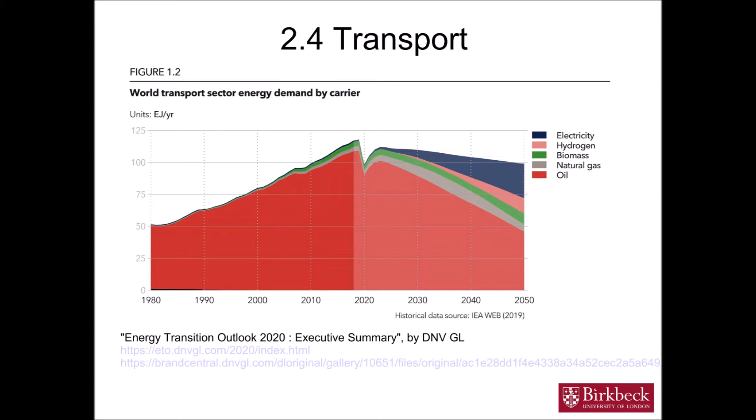The reason why fossil fuels are still very significant for transport is because of the energy density in these fuels. More energy is packed into a smaller space, and this is important when you are carrying goods and people.

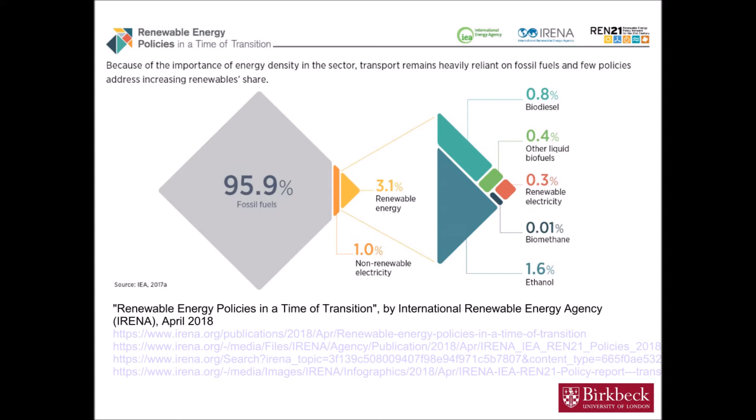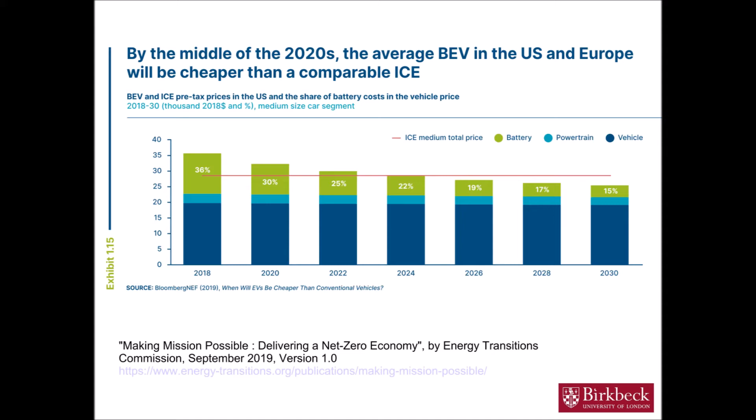With cars, which are smaller and often make shorter journeys, battery electric vehicles will become more popular and more widely sold, and as time goes by will become relatively cheaper than a comparable internal combustion engine vehicle. ICE vehicles usually burn diesel or petroleum gasoline. The decarbonisation solution for cars is clearly battery electric.

But what about freight? That is, the vehicles carrying goods long distances. Currently, trucks and buses are responsible for a very high proportion of greenhouse gas emissions in the transport sector. It's clear that some focus should be placed on dealing with this part of transport.

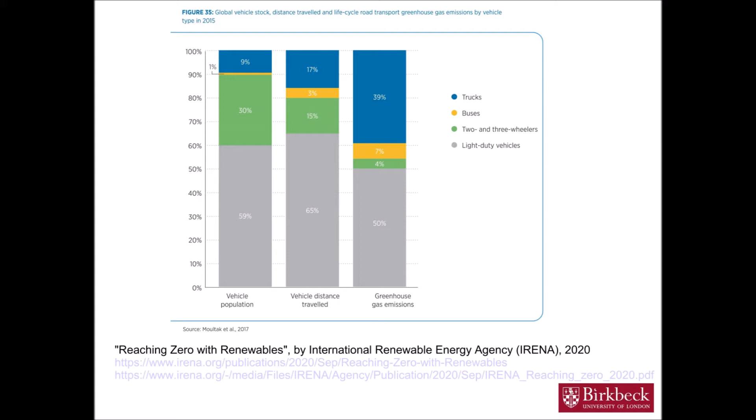Despite the fact that battery technology is improving, it will still take some time before long-haul, long-distance battery electric vehicle trucks become cost competitive. For these to be successful, there needs to be a wide network of fast charging or supercharging for these larger vehicles.

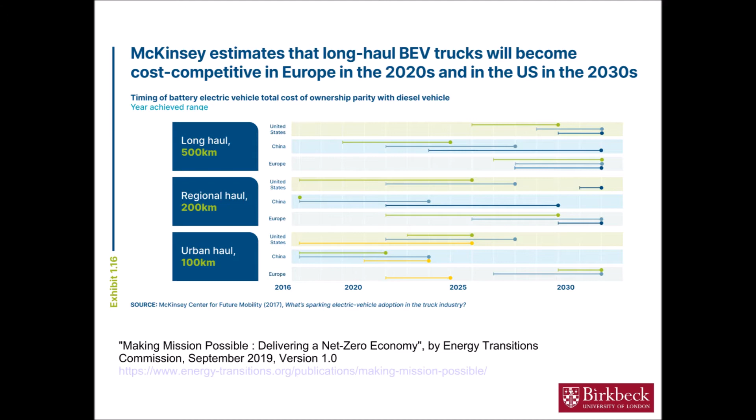Converting transport to electric drive will be very successful, but there will be a large percentage that is unreachable by battery electric technology. This missing 40% needs some work. There are a number of proposals for alternatives to battery electric vehicles, particularly for heavy-duty trucks and lorries.

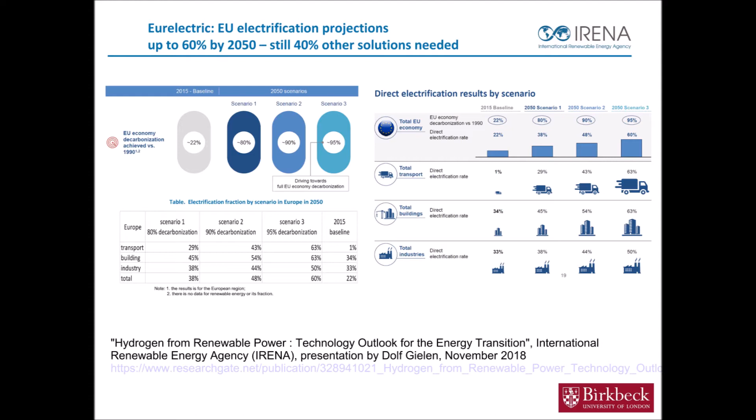One of the key fuels recommended for long distance and freight transport is hydrogen gas. So now we're going to take a little look at hydrogen. Most recent projections and proposals include hydrogen and other renewable gases. This Sankey diagram from the Energy Transitions Commission gives electricity the main seat at the table, but shows that hydrogen is an important secondary source of energy.

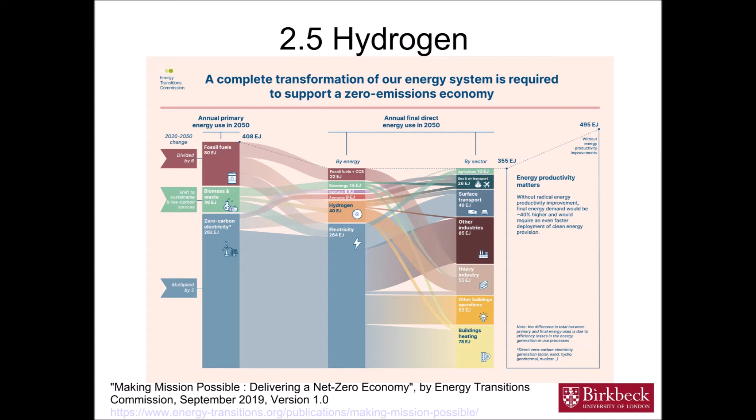Hydrogen is by no means a new energy fuel. For decades, town gas was delivered to people's homes. It was made from coal. The large structures that stored the gas, gasometers, can still be seen in various cities.

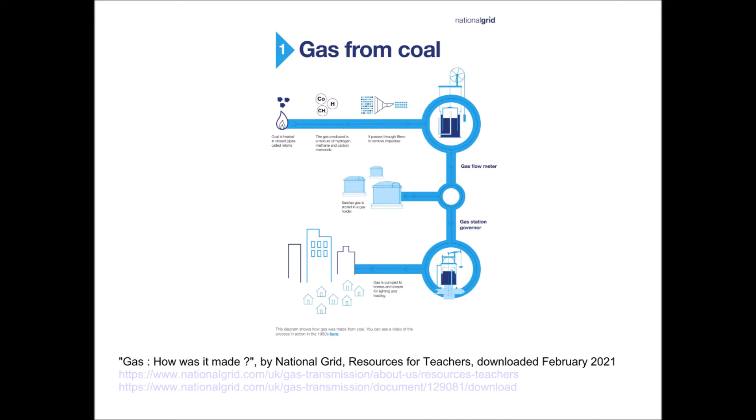Hydrogen is also in use in other parts of the economy. For example, in the refining of petroleum and also in the manufacture of ammonia for fertilizer. It is also important in one of the key technologies for manufacturing iron, and it is a key feedstock for the chemical industry, quite frequently through the synthesis of methanol.

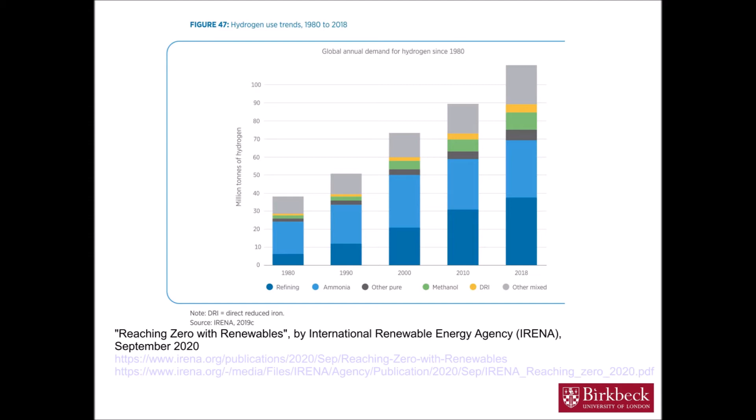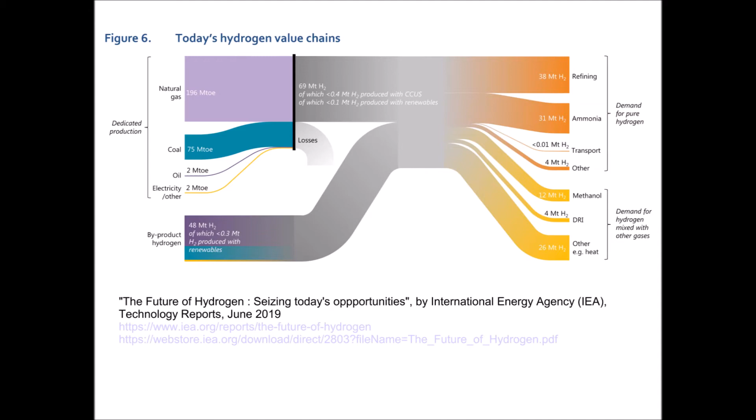Hydrogen today is mostly sourced from fossil fuels, but also partly from byproduct hydrogen, waste from other technology and chemical processes. The demand for hydrogen will continue to increase, and this will be across the economy, industry, buildings, and in transport.

And it is important to notice that hydrogen will be used to make further fuels. This will be very important for the aviation sector, as it is not anticipated to be able to fly large planes using electricity. The energy density of hydrogen will not be sufficient for large planes, and so hydrogen will be used to make higher energy density synthetic fuels.

Notice too that this ETC modelling includes energy storage. One of the key aspects of making gas is that you can use electricity to make gas and then store the gas until it's needed because there's no wind and it's dark. Gas can be stored for months at a time and so can provide buffering of energy supply and demand across the seasons.

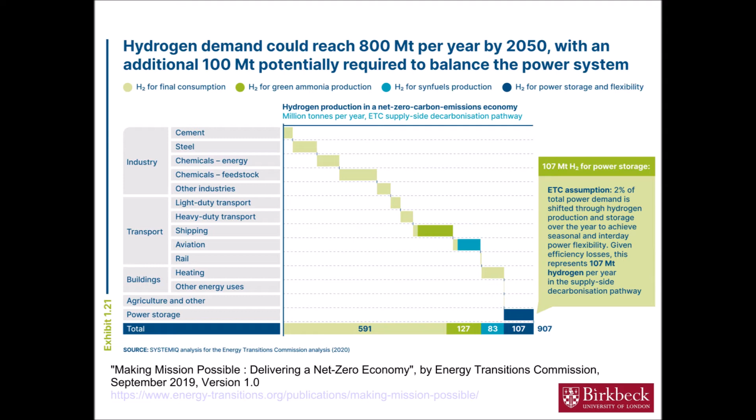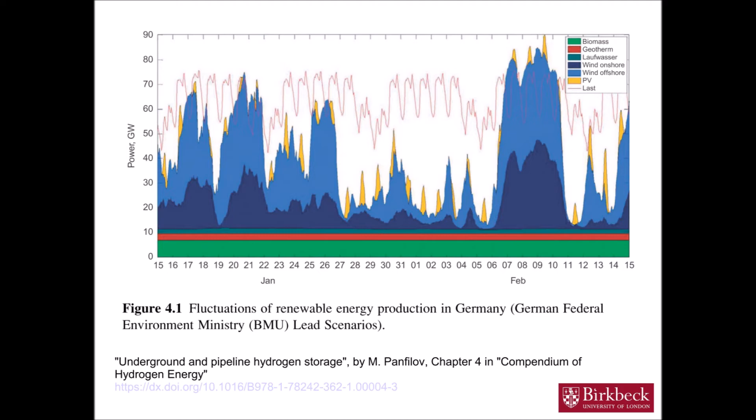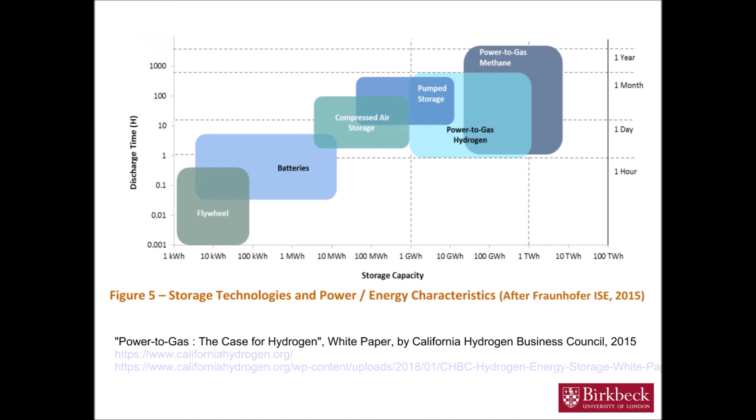Everybody is talking about hydrogen, but what kind of hydrogen? Truly green hydrogen will be made mostly by electrolysis, that is, the splitting of water by the use of renewable electricity.

Most industry communication at the moment is about blue hydrogen. This is either the steam methane reforming, or SMR, of natural gas, or the gasification of coal, but both of these technologies would need to be accompanied by carbon capture and storage in order to be acceptable in a low emissions economy. Grey hydrogen would be SMR or gasification of methane or coal, but without the carbon capture element.

Turquoise hydrogen is a definition that includes pyrolysis of methane, where the hydrogen would be released from the methane without the carbon being turned into carbon dioxide. The carbon would become black ash, a solid that could be buried.

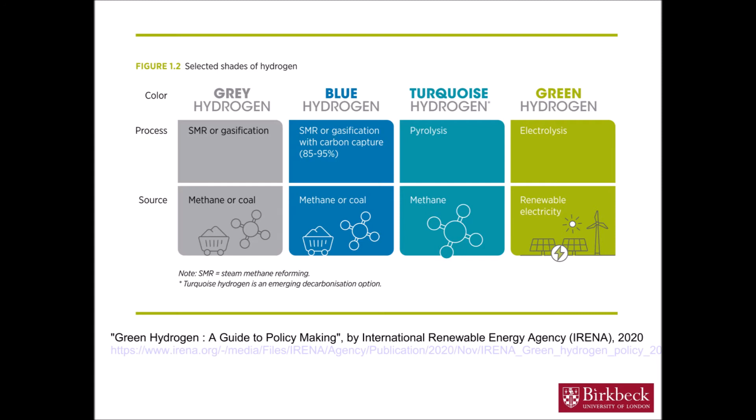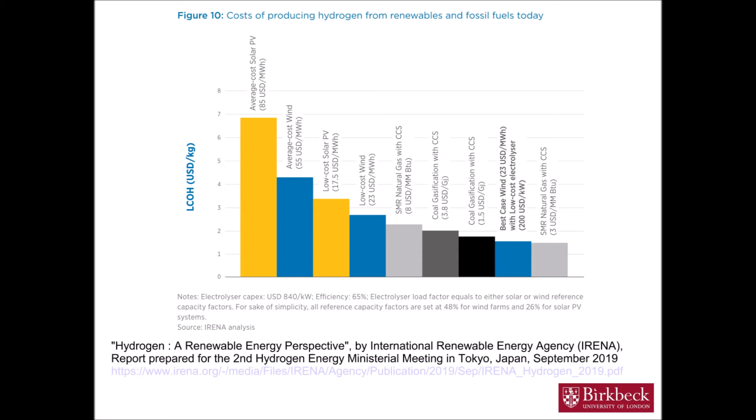Calculations of the cost of producing hydrogen from a range of sources vary widely. However, as power becomes cheaper, hydrogen also becomes cheaper, as can be seen in this chart, showing a contrast between locations with high costs of renewable power and low costs.

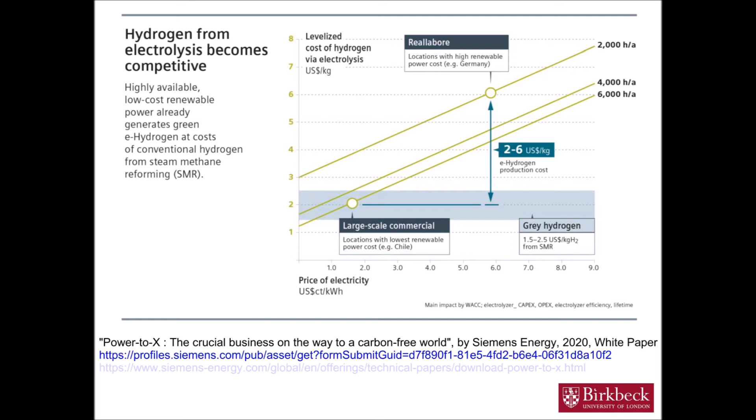Electrolyzers become more cost efficient the cheaper the electricity they use, but also the longer they are in use every year. And so you should anticipate electrolyzers and wind farms, or electrolyzers and solar power plants, to be connected without supplying electricity grids, so that the electrolyzers can run all year round.

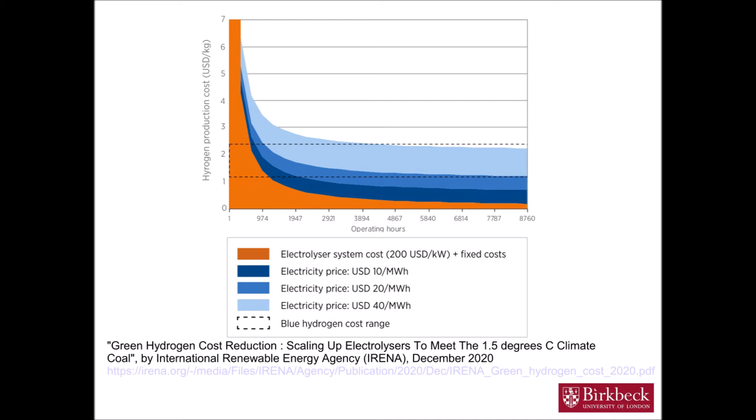And now for some chemistry. In simple terms, power to X, meaning use renewable power to make some chemical, has three main branches, each of them involving hydrogen. Hydrogen can be used on its own as a gas. It can also be reacted with nitrogen to make ammonia, or it could be reacted with carbon dioxide to make methanol, which would be a chemical precursor, or to make electric fuels or electrofuels, possibly from methanol or directly.

And in addition, hydrogen can be reacted with carbon dioxide or carbon monoxide to make methane. Natural gas is 80 to 95% methane. So renewable methane made through the power to X technologies could be a direct replacement for natural gas.

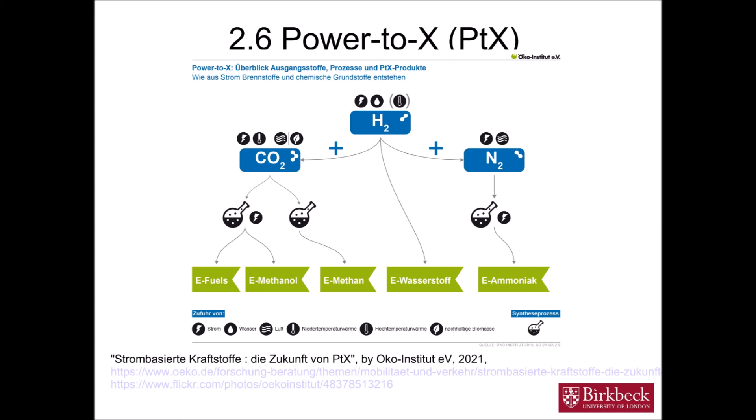These three categories of power to X have multiple applications. Methane, methanol, and other synthetic fuels can be used for power generation, as chemical feedstocks, and for making carbon neutral synthetic fuels. Hydrogen can be used directly for mobility. It can also be used for power generation and as a chemical feedstock. It can also be burned directly to provide heat.

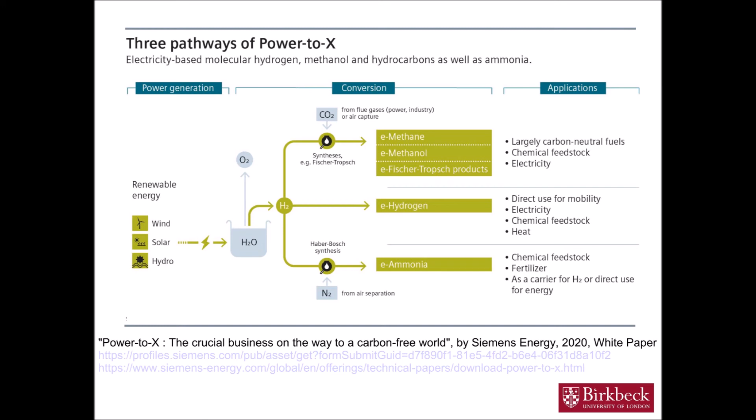Ammonia is currently used as a precursor for fertilizer and as a chemical feedstock. In the future, it is likely to be more widely used as a carrier for energy. One of the important things to note is that methanol made from hydrogen can be very useful as an input chemical to other processes that make very useful fuels.

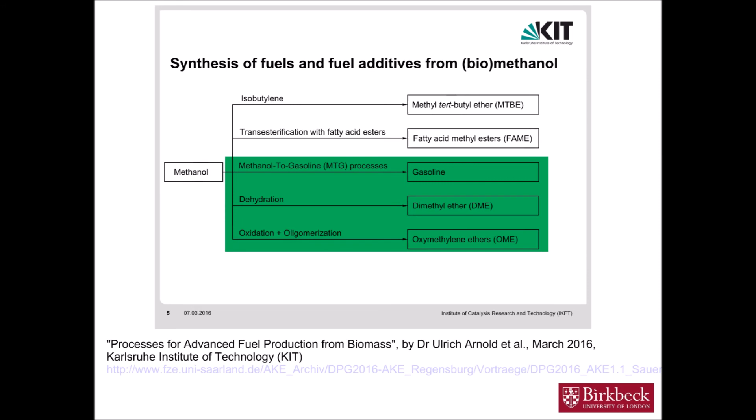You can make renewable gasoline from methanol. You can also make dimethyl ether, or DME, which is a fuel which is gaining popularity. You can also make oxymethylene dimethyl ethers, or OMEs, and there is work being done on using these to replace a certain proportion of diesel fuel. As OMEs have quite a lot of oxygen in them, they can burn very cleanly.

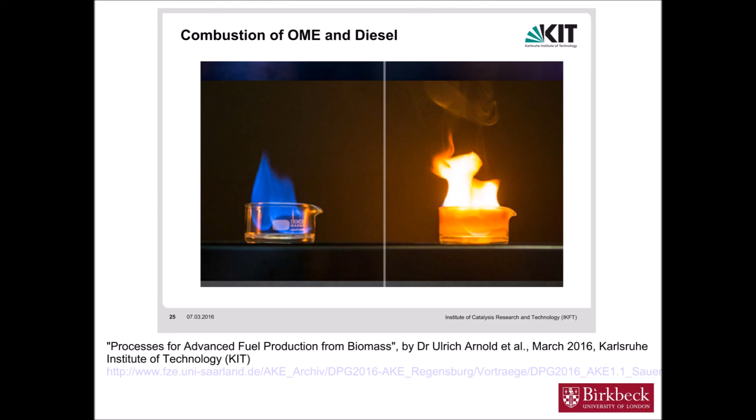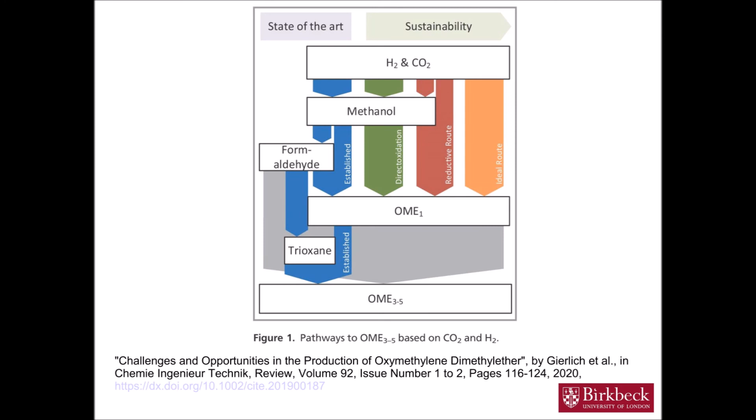Although a number of companies are currently studying the use of OMEs, their synthesis is still under development. Efficiency and the side byproducts need to be resolved. At first glance, it may appear to be inefficient to capture carbon dioxide and pump it underground to make sure it does not go into the atmosphere. But this technique of CCS is likely to result in hydrogen, blue hydrogen, remaining quite cheap compared to other options.

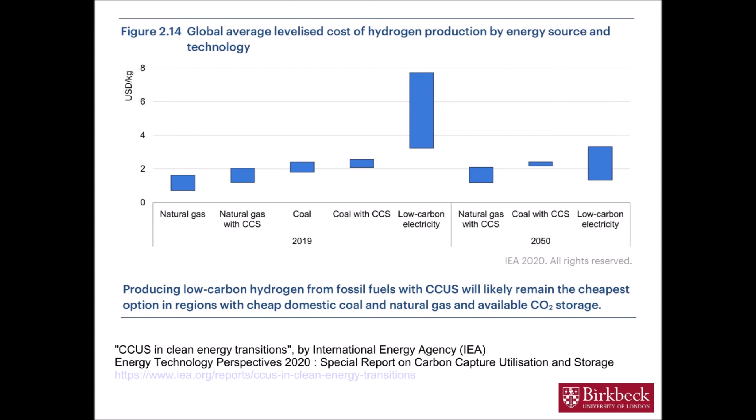CCUS is a term used to mean carbon capture, utilization and storage. The utilization part means that carbon dioxide is being used in the synthesis of new fuels. As these synthetic hydrocarbon fuels will be burned, this carbon dioxide will end up in the atmosphere. So it is not fully renewable or sustainable. However, it displaces the need to mine some hydrocarbon fuels. In other words, instead of pumping more oil, we can make some oil from carbon dioxide that would otherwise have been thrown into the sky.